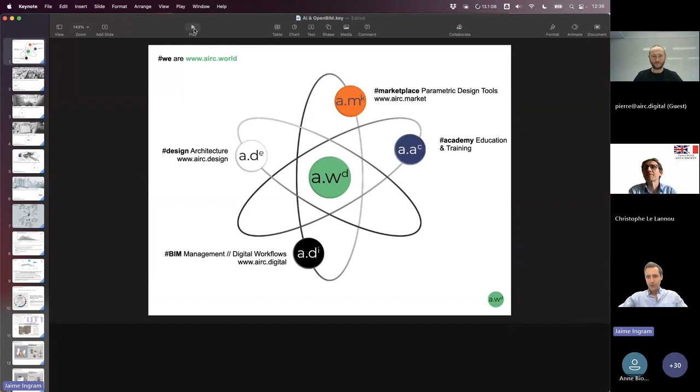So without further ado, Jaime, the floor is yours. Thank you for being here with us. Thank you, Pierre, for the introduction. I hope everybody can hear me. Going to start the presentation now.

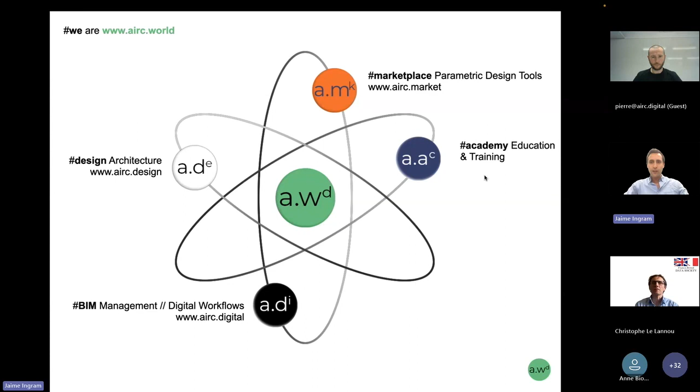As Pierre mentioned, we are airc.world. We are a group of companies and different brands that we use to provide services in the built environment. We have airc.design, which enables us to provide architectural services, and that complements our consultancy services and BIM management that we provide with airc.digital, which retrofit each other. The result of this collaboration generally leads to tools or automations that we first test internally, and then we commercialize in our market for other architects and designers to be able to use these tools. We also have a branch for training and education called airc.academy.

Today, we are going to introduce digitalization in the AEC sector, and give a bit of a framework of how we arrived at the current situation. We are going to review a few of the stages that this digital transformation has taken in recent years.

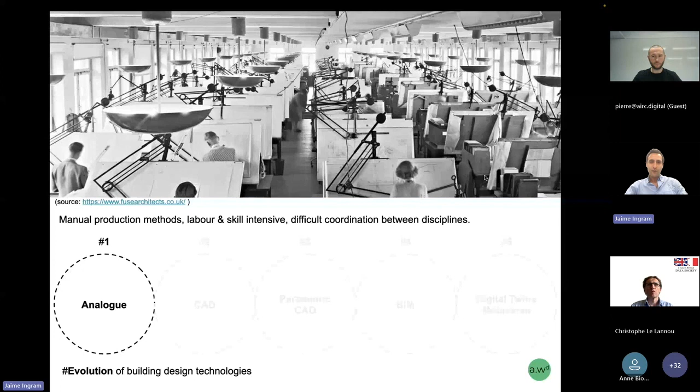The first production method we used to have in the AEC industry was analog methods. This was very labor intensive and skill intensive, so you needed to be a good draftsman to develop architectural drawings. It wasn't just technical formation, but also the ability to actually draw by hand, which not everybody is skilled at. Also, being paper-based and analog-based, coordination between disciplines was quite difficult and often not very profound.

With the introduction of personal computers and the first CAD applications, we started to transition to digital production methods, which require less labor. People working in the industry became more efficient, and also less skilled, in the sense that you didn't need good hand drawing skills. You just needed to learn a particular software, and the software was replicating what we used to do by hand, but without knowing generally what the context was.

For example, in CAD, a line represents a line, and this can be anything you want to represent with a line. Two parallel lines can be a wall, but also can be part of a detail of a screw, or simply a design that you are starting to sketch. But the program doesn't have context of what you are trying to represent with that.

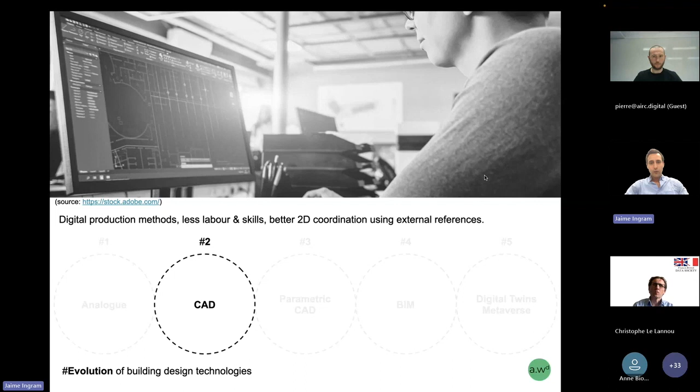Of course, this enabled better 2D coordination because we could overlay drawings received from consultants, for example. So this enabled a bit better collaboration.

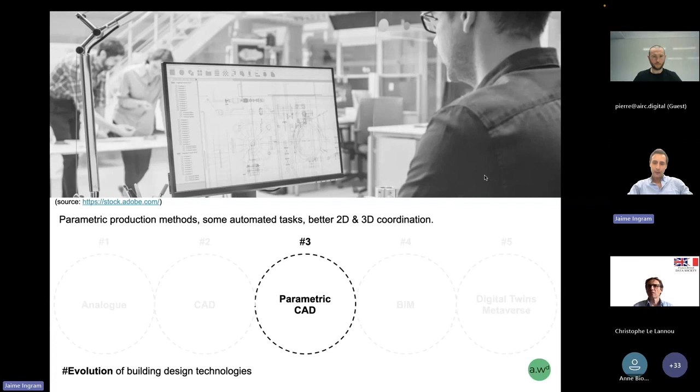The third evolution was to introduce parametric CAD, with the idea of automation in the drafting process, as well as intelligent objects to a certain extent that could adapt to different dimensions or different layouts. Of course, 3D modeling also started to be part of the CAD workflow, although the software still didn't know the context of what you were trying to represent, and didn't have information about the 3D model as a virtual representation of the building.

And that is different from another object, which can be a roof or a column or a slab. This rich model then produces the rest of the documentation required for the project, or any other output. It can be 2D drawings, plans, elevation sections, could be animations, virtual reality, cost extraction, analysis of the different components. So it is a much more information-driven approach.

And of course, it also enables coordination between several disciplines, because instead of sharing drawings, which is very difficult to compare to each other, we are sharing a 3D model that we can run clash detections on and visually inspect that they are coordinated, and even make comments for the other disciplines to take into their own model.

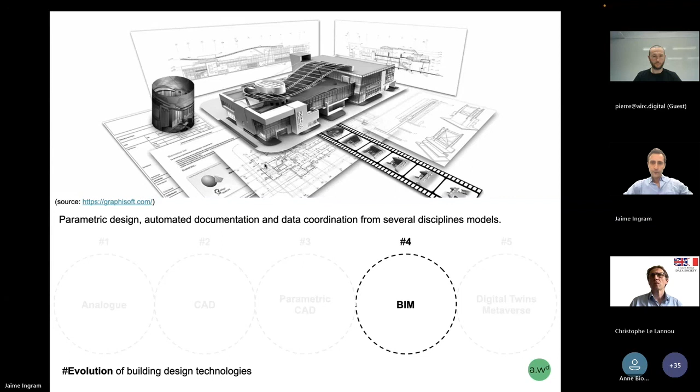The next step, we think, is going towards artificial intelligence design. So basically trying to add more complexity to the computing engine that is helping the designer in a much more interactive way, which is allowed by the current trends of artificial intelligence and the power they are able to process information with.

Also, we are evolving towards automated construction methods. So soon the BIM model won't be just a representation that then has to be interpreted on site, but it will be a direct translation from the model to the site by robots, either 3D printing walls or automated processes in manufacturing that then produce the components that will form the architectural design in the end, but all machine-driven and automated.

This also connects to the concept of digital twins, Internet of Things, and the metaverse. We will be able to have real-time performance data of the buildings we design during operation, and all this information captured by sensors could be replicated in what will become a digital twin.

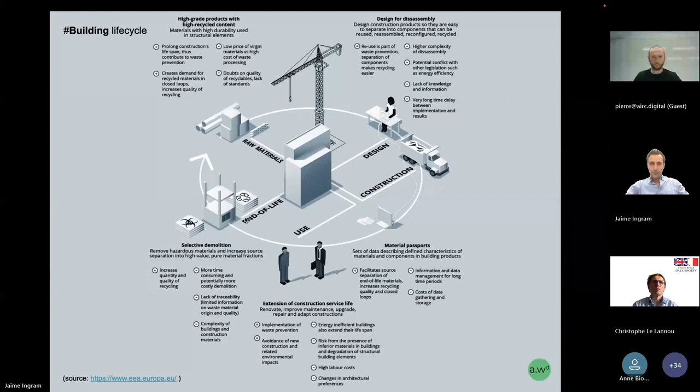In this context, BIM is already changing the way we design buildings. The traditional workflow meant a lot of design effort was done just before manufacturing and construction, with little coordination in the early stages. With BIM, we try to bring that effort to the start of the process, adding as much information to the model as possible in the early design stages. So when we reach construction, most issues have been foreseen in the virtual model and resolved before getting to site, where changes are more expensive to make.

The collaborative design process is very important, and as much as possible, the stakeholders relevant to the decisions needed for the final design are encouraged to be brought in at the beginning of the process. So we think people are central to OpenBIM, not just technology.

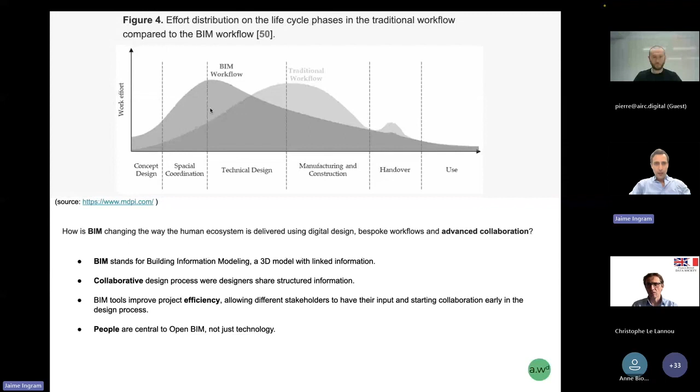There is an international ISO standard, ISO 19650, dealing exactly with these matters: how to share information in the BIM environment and how this collaboration should take place most efficiently. It's based on previous British standards that started in 2007, but has been embraced by many different countries.

For example, in France it's already compulsory to produce building information models for any public project above a certain size. The same happens in England. In Spain, they are just starting to implement this this year, aiming to have it ready by 2030. In general, every country is realizing that building information modeling and digitalization in the built environment is fundamental to being more efficient in how we produce, share, and archive information, and access it afterwards.

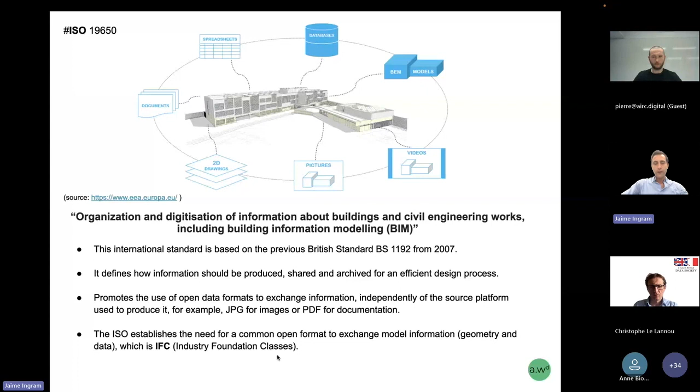Central to this idea of collaboration and sharing information is the use of open data formats, independent from the source platform used to produce them. For images, we have JPEG, an open data format; for documentation and text, we have PDF, which can combine with images. The equivalent open data format in the BIM context is IFC, Industry Foundation Classes, an open 3D geometry format that also holds all the data related to the geometry.

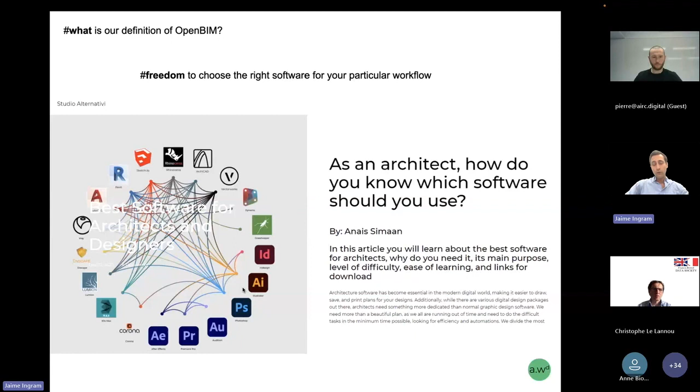We believe in the idea of ISO 19650 that we shouldn't share information using proprietary formats, because then it's locked to a certain manufacturer or copyright holder of that software. Therefore, we believe IFC is central to sharing information in an open way, and to being able to access this information in the future regardless of the software version or platform.

This is an example of how parametric design is currently helping automate tasks that used to be manual in the design process. Here we see a connection between Rhinoceros, a modeling software, Grasshopper, a visual scripting tool that generates geometry by connecting nodes into different operations, and an automatic translation into the BIM model in ArchiCAD. We're connecting three different softwares, and the introduction of AI into these processes will help make this more efficient.

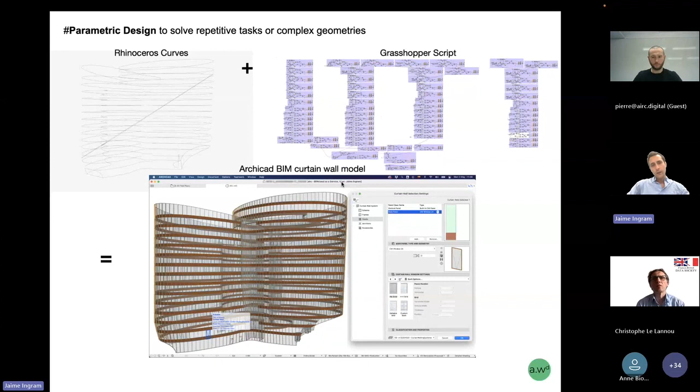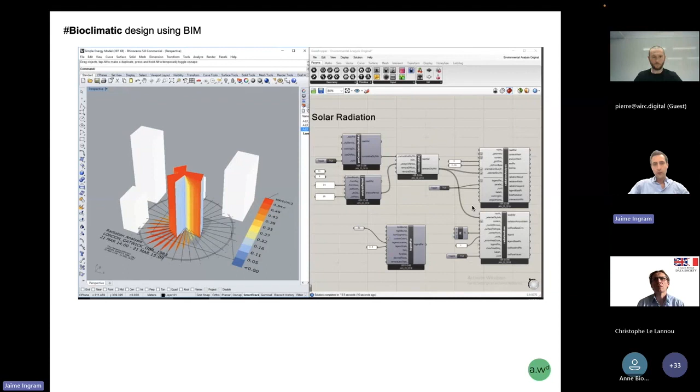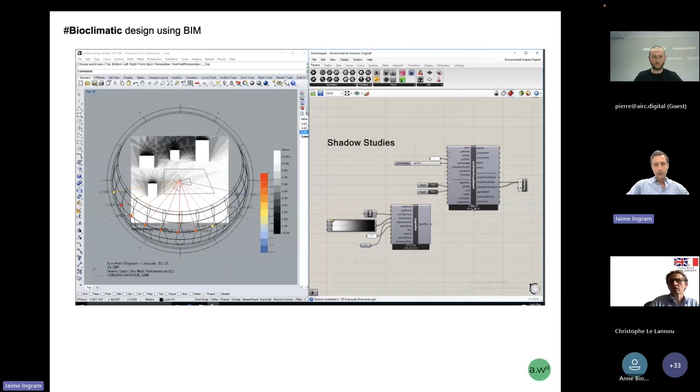In the same sense, the 3D models and BIM models we produce during the design process can be used to simulate real-world conditions, such as irradiation on a building facade for a particular location, or shadow analysis for a particular date and location. This is an example of this kind of analysis done in Rhinoceros across different floors of a building we are currently constructing in London.

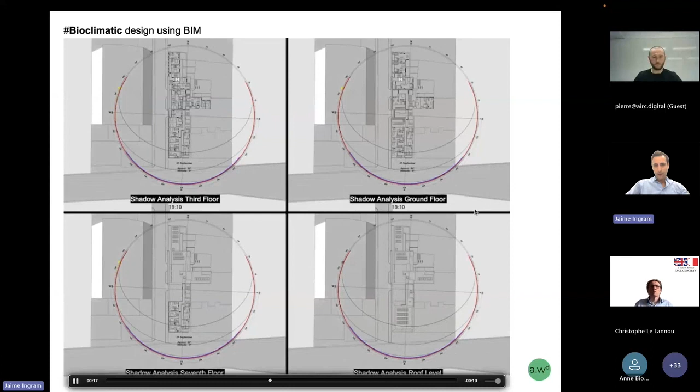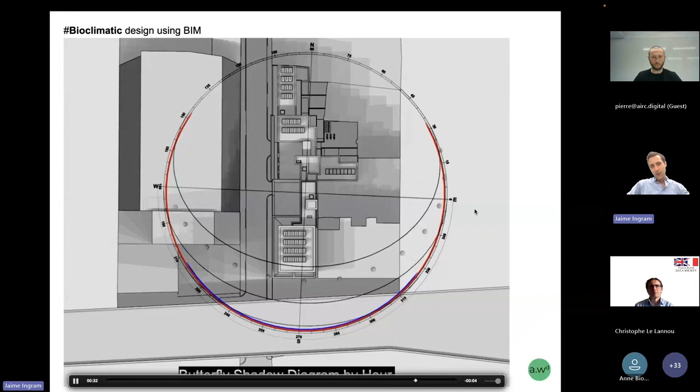Currently, a lot of this depends on what capabilities the software has implemented. But we believe AI will help drive this kind of environmental analysis and make it more accessible in a much more automated way, because as it stands now, you need fairly specialized knowledge to produce this information.

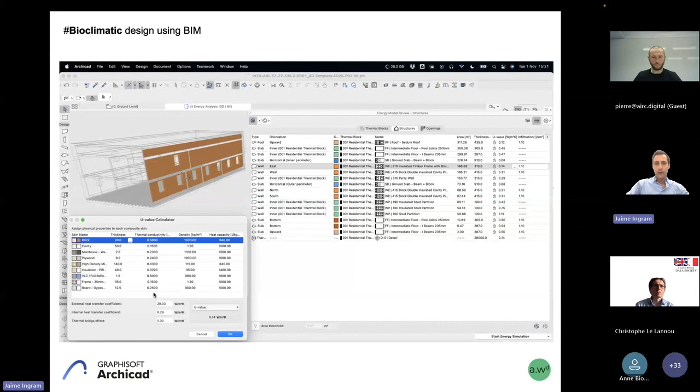This is another example: EcoDesigner, within ArchiCAD, the design software we use. Here we see different elements of the building being analyzed for their energy performance. Because the model contains all the data, for example of a particular wall, we can calculate the U-value according to the real material thermal performance, and therefore foresee if we are complying with regulation.

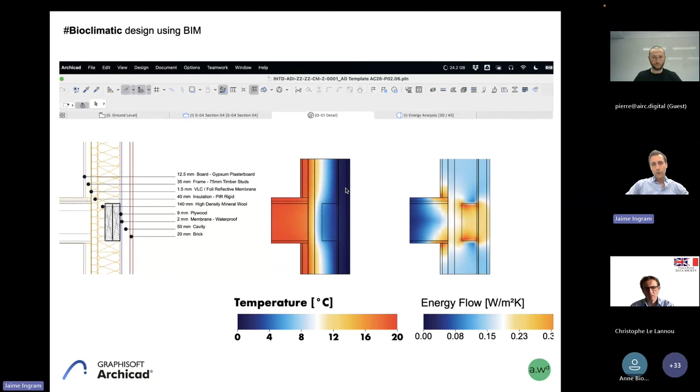In a similar way, we can analyze thermal bridges and feed this information into the energy model. All of this is currently manual, with a lot of steps to reach the final result, so we think AI will help bring all this together.

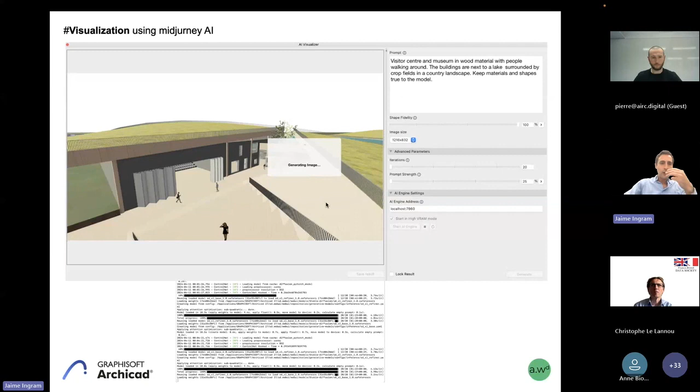This is another example of how AI is currently being introduced into a lot of the design software used in the industry. This is Midjourney, an image-generating environment where, using a prompt, you describe what you want to achieve, using a simplified image or concept you've modeled in the software. It then processes that image and produces a result interpreting the prompt and the base geometry you introduced.

Here we see different results from different prompts, but we find these kinds of images are more useful for inspiration at the initial concept stage, because by the nature of AI image generation there will be mistakes and things that don't look quite right. So we don't see this yet as a replacement for fully user-driven renders based on the model, but rather as inspiration, and that's how we've been using it in our projects.

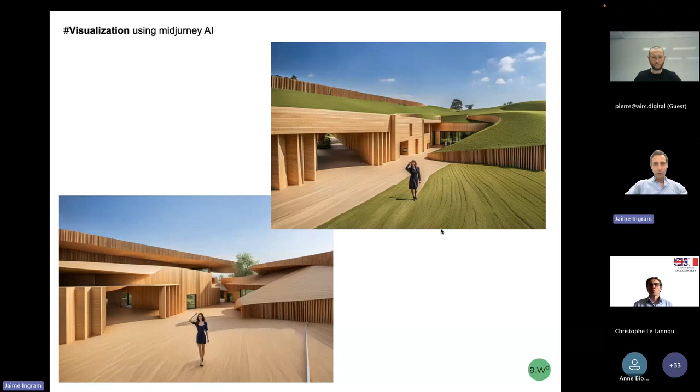This is another example from a project we're developing, giving different prompts for graphical styles of an interior render - in this case a more stylistic, drawn effect on one, and a more realistic, photographic one on the left. But you can see the interpretation of the initial model can be quite different - for instance, a sky appears on the right that wasn't part of the initial image.

We can also see skylights appear, so the AI doesn't always produce the result you want. For example, there was a glazed balustrade running through here, and it's simply removed the central section. So in a way it can be used to produce images and inspiration, but we don't think this could be a final render to give to a client.

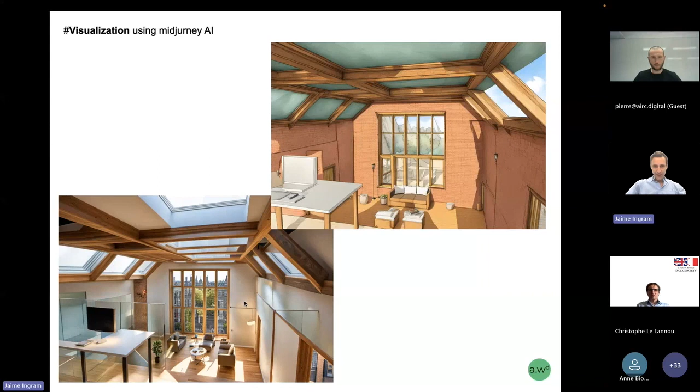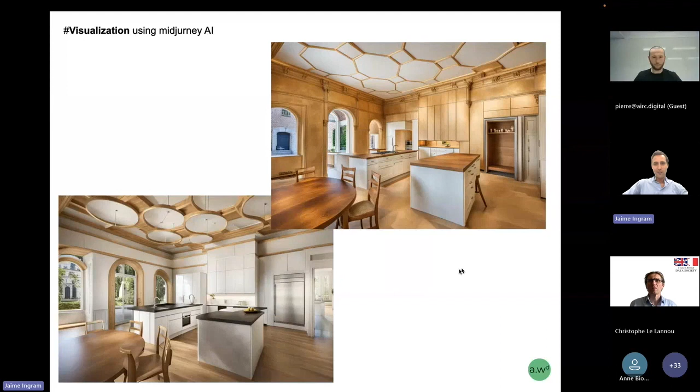These are closer to a final render, but there are still mistakes. This is just exploring different ideas for materials, all based on an existing model where we're proposing some different options.

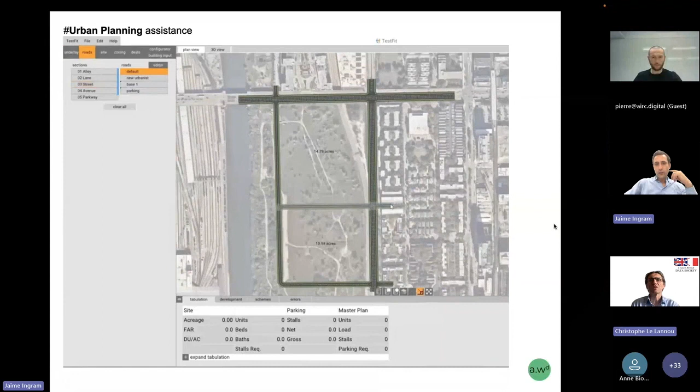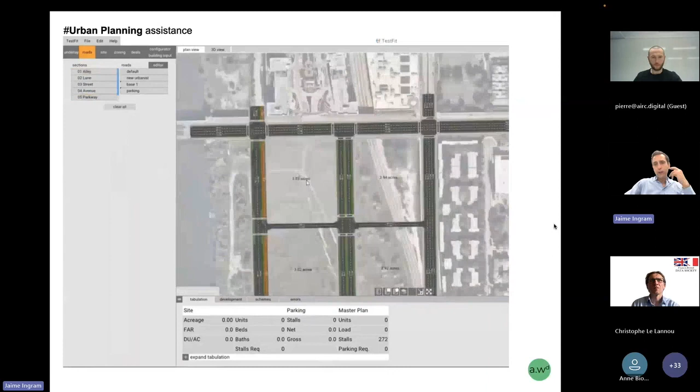We also see the emergence of completely new online applications. For example, in this case, an urban planning assistant driven by AI. So you can very quickly assess different options for urban design, for example. A lot of this is driven by code compliance and databases of what the building code in that particular area needs to comply with.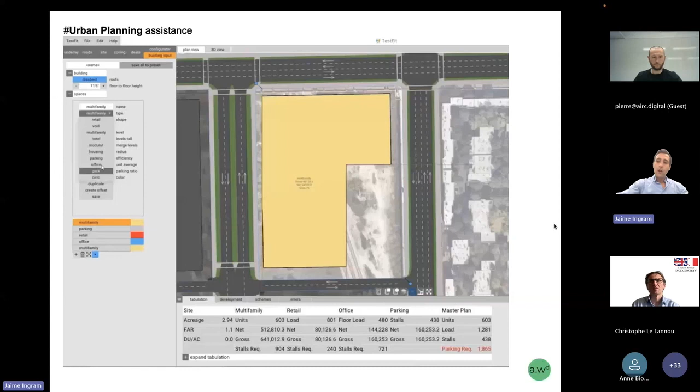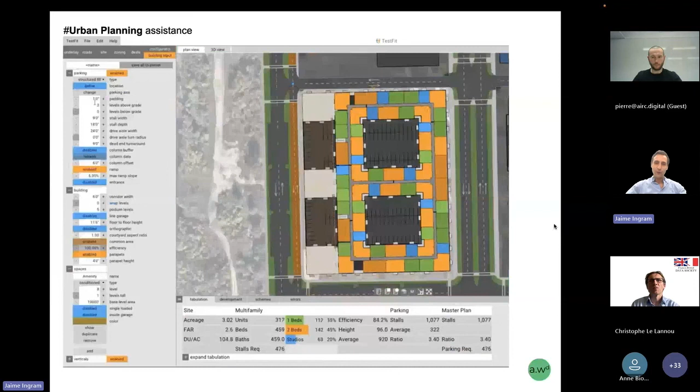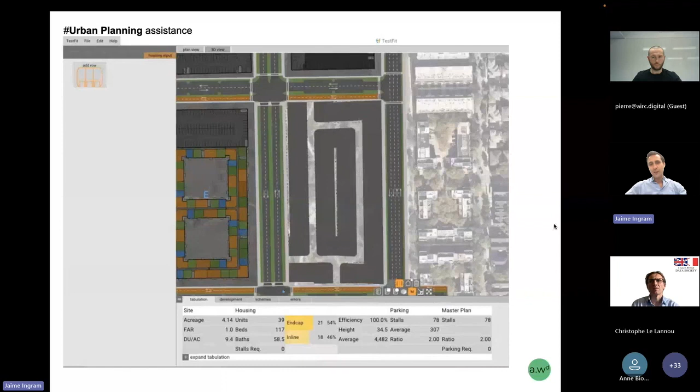We need to mention that the interpretation of building codes is currently the most challenging problem we are facing integrating AI, because they are not written in a way that is easily interpretable by machine learning, and they are usually subject to different interpretations, and it's not really systematized the way this information is produced, depending on the location. So an important step to be able to check compliance with AI will be to make the building codes machine readable in this regard.

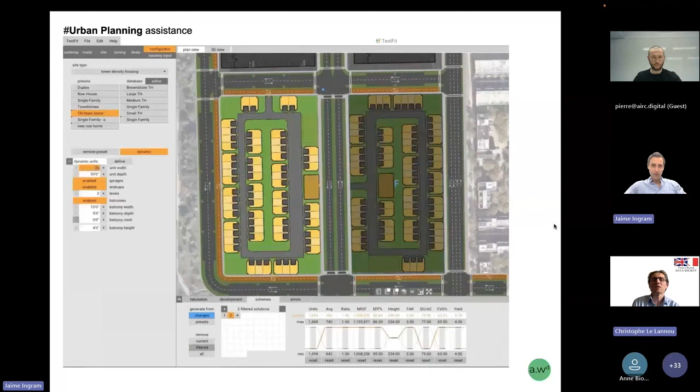Wait, can you hear me? Yes. It's already 27 minutes, so it's going to be time to finish shortly. This is another example.

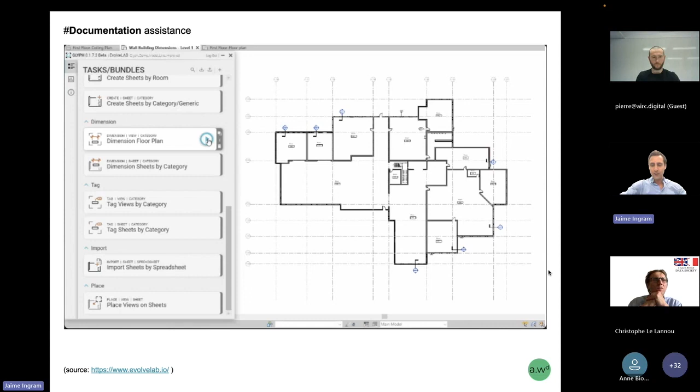We get a couple of questions. This is an integration of AI in current design software, basically automating tasks that the software is already able to perform by itself, with help from the user. We also think the logical integration of AI in design software is to try to help the users, not to create new tools from scratch, because all of it needs a framework behind it to be able to work on.

Just to finish, we think that there is no OpenBIM without an open mind. So let's embrace OpenAI as part of the BIM journey. Thank you.

Thanks a lot, Jaime. That's very fascinating as well. So we have a couple of questions in the chat, and maybe I can read them for you. First question from Ludovic is wondering if you can comment a bit on your cybersecurity policy and the cybersecurity aspect of your operations.

Well, we tend to work in a cloud environment. We work remotely, so we use our own servers to develop our designs using ArchiCAD, and all the design team can connect to this server. That's one of the strategies we use, because we are also quite mobile and work remotely, so this helps a lot with the way we work. To store our project information, we use Google services currently and our own servers.